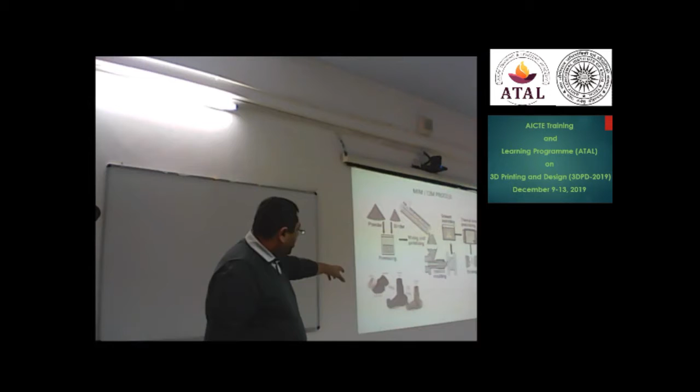What happens after this molding process? You can put the material back if the molding fails. But after the sintering process, you can't put the metal back as a metal powder. It has to go for recycling. Another drawback of this system is, if you make any parts, it's 100% solid inside. You can't actually make the internal structure. And internal structures can save you about 70% cost of material, because you can get the same strength by making a lattice structure inside, like a honeycomb structure, to get the same strength of the part.

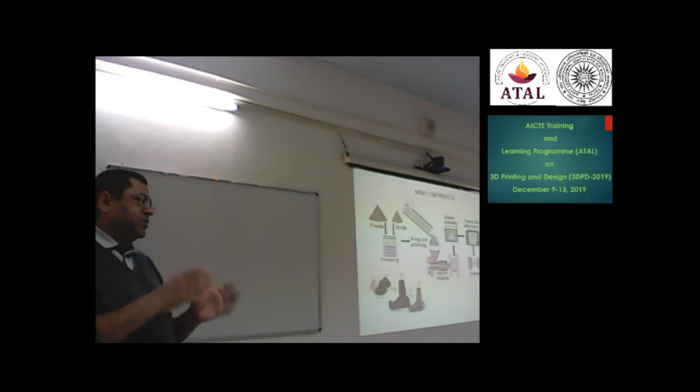Another problem of injection molding is you can't create grooves or cuts in many places, as the mold has to open and the part has to go down. So you can't create a lot of different faces or cuts. It's a very straightforward process. So that's another drawback of the current system.

Now let's look at casting. What's happening in casting is, you make a part, you put it in the mold, that mold is put in the oven, and the part is usually made of wax. It melts down, you fill it with metal or whatever material you want, and then you get your final part. Again, it's a solid part. You can make a lot of faces, but it's a limitation because you need a setup, you have to be trained in casting. Casting fails very fast because if you make even a little error in the process, there will be cracks or minor pores inside the cast part.

Then there's sand casting. In sand casting, again you make your part, it goes into a mold, which is a two-part mold. You create a cavity, you pour the metal, and you get your final part. So in sand casting also, it's 100% infill inside.

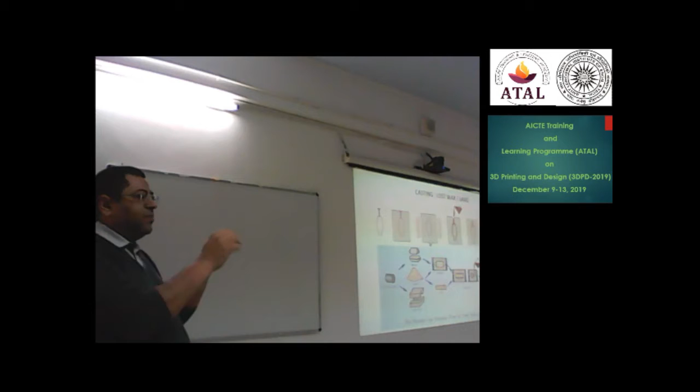There's a seam line on the sand parts, if you see, and that seam line has to be clean for every part. Okay, so all these processes are basically now leading to more work. There is extra work when it comes to doing this.

And also if you see all these processes, they require professionalism. They require a lot of attention of the person making the part, because if there is an error in creating the mold, it will lead to a defect in the part itself. And in most of the industries, they will create oversized parts and then it will go in a lathe or a CNC machine to be finished. Okay?

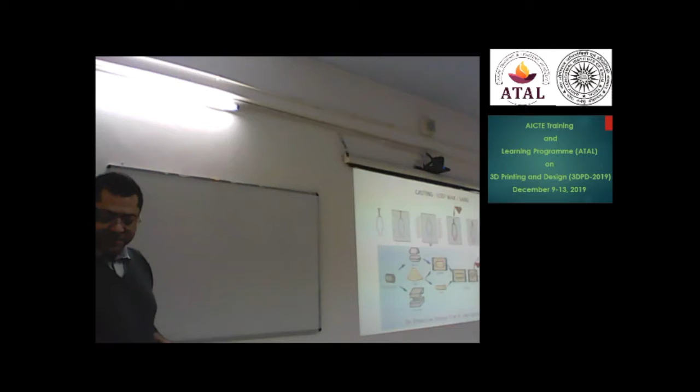So that brings us to 4 types of technologies when it comes to 3D printing. One is powdered metal or ceramics. So what is powdered metal or ceramics? We take powdered metal and we layer it in a very fine layer. Then we use either laser or a binder to join those metal particles together. These layers are 10 microns or 5 microns, so they are very fine layers, melted or binded by a specialized machine, layer over layer.

So now if you imagine yourself in 2D, you can actually create internal structures and the whole part is created as one piece. There is zero wastage because the powder which is left unbinded can be reused again. Okay? I'll just show you a short video of how this works.

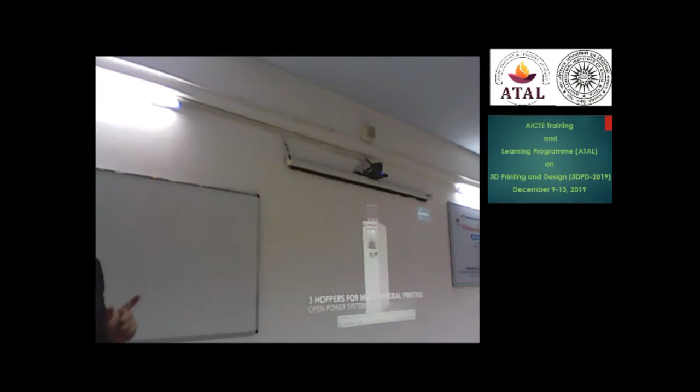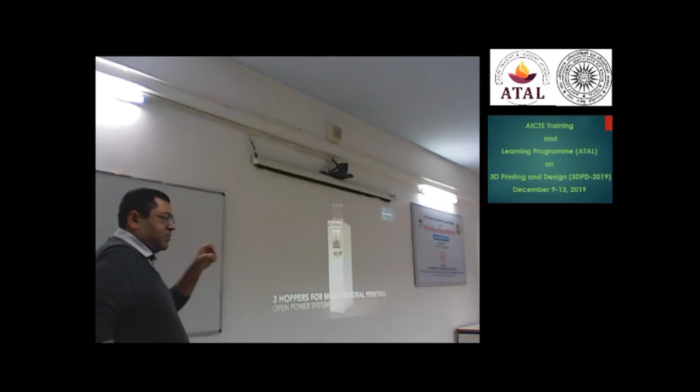So this is our machine. It's called Aurora Labs. It is a desktop metal printer which runs on powdered metal. There are 3 hoppers on the top, which allow you to put 3 different metal powders on the machine, so you can technically print 3 metals simultaneously. Then there is a chamber used for making the part. It's a vacuum chamber with argon gas inside, so the part doesn't get oxidized. We all know metal gets oxidized if you make it hot at certain temperatures.

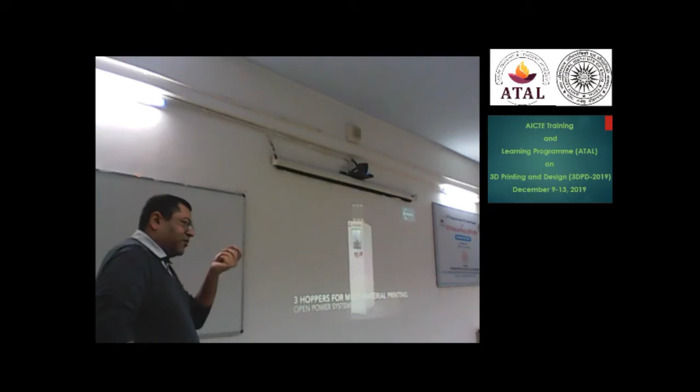Once you start printing, it layers a very fine layer of powder, sinters it using laser, then puts another layer and sinters it. It's like welding a layer, then another layer of weld, another layer of weld, and then you get your part. But we are welding using very fine laser, and the particle is very fine, so it creates a part which is 100% solid. You can create hollow structures inside, and it's very fast actually.

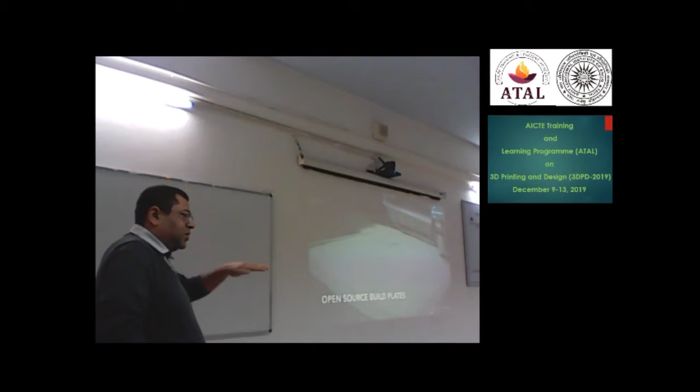So if you saw the process, these are very, very fine powders, almost like 50 micron size powders. It's laid on a bed, the laser fires it, the next level is formed, and so on. There is a wiper to wipe out excess powder from that layer. So everything is happening in micron layers.

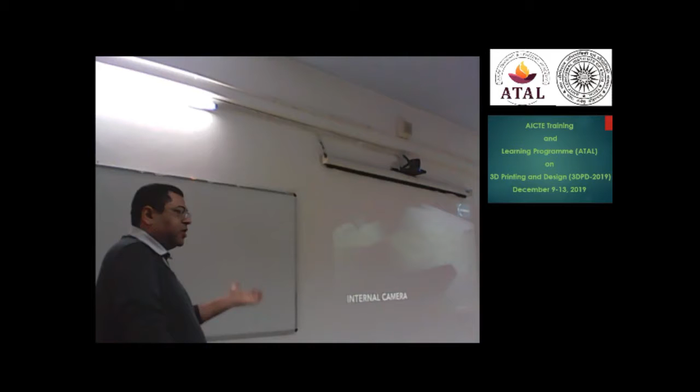So this is a heap of powder which is left after the machine finishes, and you have to manually remove it. You can also use a specialized vacuum machine for removing all the powder, and it's 100% reusable. You just put it back in the hopper and reuse it next time.

I'll just go back a bit. Where the pointer is pointing, these are structures we have to put to support the part when it is getting printed, and they also help in removal of excess heat. Because it's using laser, it's running at around 1800 to 2000 degrees centigrade, so you have to remove the excess heat from the metal, otherwise it will start to warp. Like plastic starts to bend when you heat it, and that's the importance of

Lost PLA or wax casting. That is another area where innovation is very important in terms of additive manufacturing. Even though it is very close to the current technology, there is a lot of difference. If you see a jeweler, if you see dentistry, if you see lots of occupations, these people can only make a few items by hand, and not too many people are skilled in making artwork.

So if you see a normal potter, for example, he is good at his pottery, but you and I are not very good at pottery. We can't make a pottery design. So what can we do? We can simply design it on the computer and print it on a printer. And we'll get the same design output as this.

So this has helped in changing the jewelry industry a lot. Because today, you can simply feed the design into the machine, and anybody at the press of a button can keep printing it. And 90% of the industry that you see is just repetitive work of printing. Okay.

Another thing that was happening is, even if they wanted to print one or two jewelry designs, they had to go through the whole molding process, which means they had to first make the design in wax, then make a silicone mold out of it, and then they could make multiple pieces. And there were limitations, because if I had to make two pieces or three pieces, it used to cost a huge amount of money. And there's a lot of wastage in terms of time. Time is very expensive for a person like a karigar.

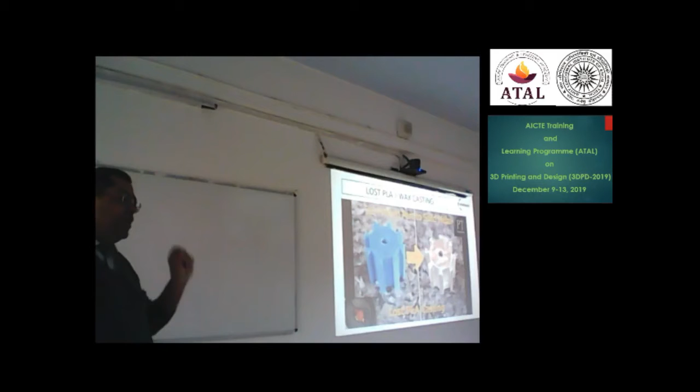Another thing that you see is mold cavity creation. So, why spend time making a mold when a machine can make that for you? So, these are high temperature ceramic blocks, and it's simply printed on a machine.

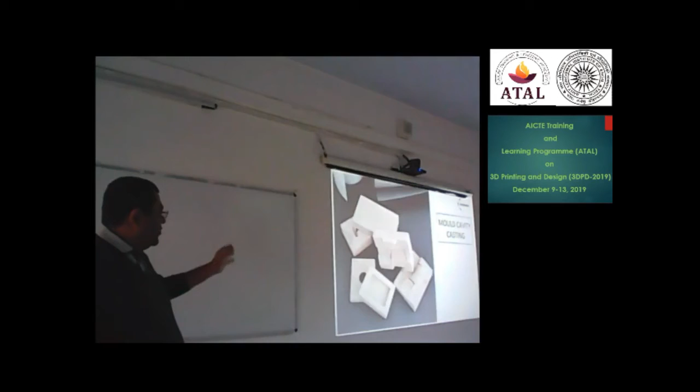So, if you actually go to a traditional industry, first they have to make a masterpiece, then they have to create mold blocks for every part of that masterpiece. Then it goes for casting, it goes for validation, then it can go into production. There is a huge cycle from actual prototyping to production. It can go anywhere from 2 years to 5 years. We have completely cut short that process.

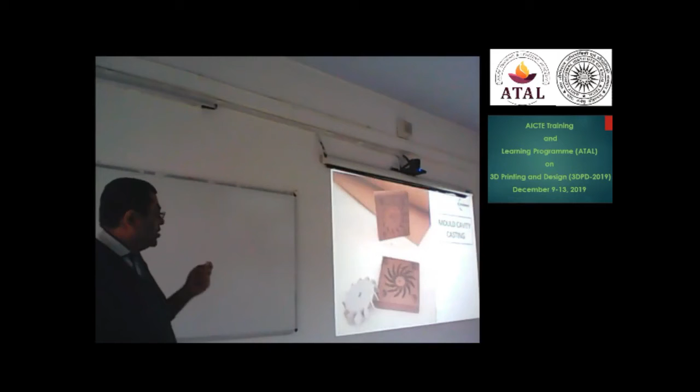So now you simply create the mold, and this mold is from your design on a CAD, so it is absolutely accurate to the final part. So rather than you doing all the work, the computer is doing all the work for you. All you have to do is think on developing your part, and the mold cavity happens by itself. Okay, so I'll just show you a short video on how this machine works.

So this is Ceramo. It's a ceramic printer, and it can print about 8 types of ceramics now. But it's totally open source, which means you can put any ceramic, porcelain, or such material, and you will get a print. So what happens in this machine is, you put fine ceramic powder of whatever you want to print with. You can make food grade ceramics, you can make high temperature ceramics, anything. It can be very high end ceramics for making spacecraft parts, does not matter. You just put it in there.

It uses a binder to bind that ceramic into a shape, and then you put it in a kiln, fire it to make it a proper part. Okay, so the firing process is old, it's been used for thousands of years. It's a well-known process. All we are doing is binding it using technology. And you can bind almost any kind of ceramic powder in this machine. It's a very fast machine. So very soon you will be seeing a lot of your cups, plates, and other things getting printed on this. That's Ceramo.

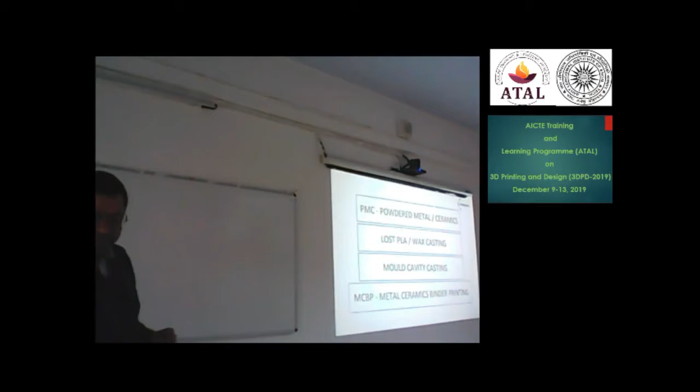So this is called FilaMet, or short form for metal filaments. This technology is available in our institute now. What happens is, it's 80 to 90% metal, with 10 to 20% binder, depending on the metal and the compound. You simply print it like PLA. So because most of you have not printed before, I hope you will understand. You will have to try it out once. But it's very easy to print it.

Everybody must have used a glue gun, right? It's just like extruding a glue gun out. So imagine a machine like a glue gun, and it's doing the same job. It is that easy. Now imagine the power of this technology. Even a 9-year-old can print in metal. All he has to do is insert the filament in the machine, put his file, press a button, start, and that's it.

So it's very, very inexpensive to use these things. And the applications of this technology are far greater than we thought. Not just metal or ceramics, you can do any kind of earth materials, whether it is marble, rocks, glass, any kind of metal using this technology.

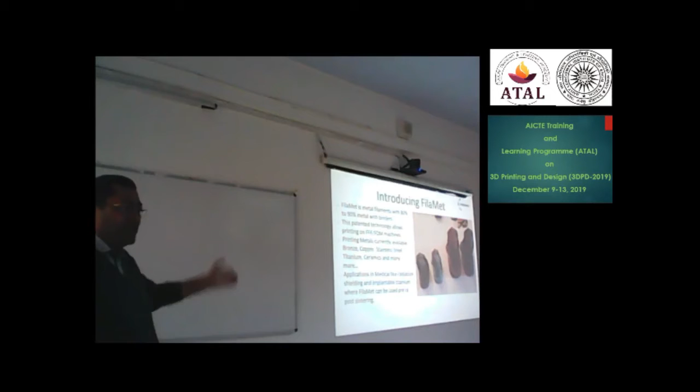So how does metal ceramic printing actually work? At the forefront of this technology, there are two companies which are now the leaders. One is very old, BASF, everybody knows about them. And the new one is The Virtual Foundry. What you do is simply make a part and slice it using specialized software. Because most of you have not used Cura before, I am not using it here, but Cura is the software that we use to slice it. It gets printed on an Ultimaker.

Then, depending on which company's filament you are using, it goes through two technologies. If you are using Ultrafuse, it goes into catalytic debinding, and then finally into a sintering oven. If you use The Virtual Foundry, it simply goes into the sintering oven after print. So this is like a workflow.

So you take the filament, make a part, print it, debind it, put it in the sintering oven, and then you have a metal part. It is that easy. So you can continuously print it, continuously debind it, continuously put it in the sintering oven. And just before the sintering oven, the 3D printing part is something which is so easy that even children can do that. It's a really, really easy process now.

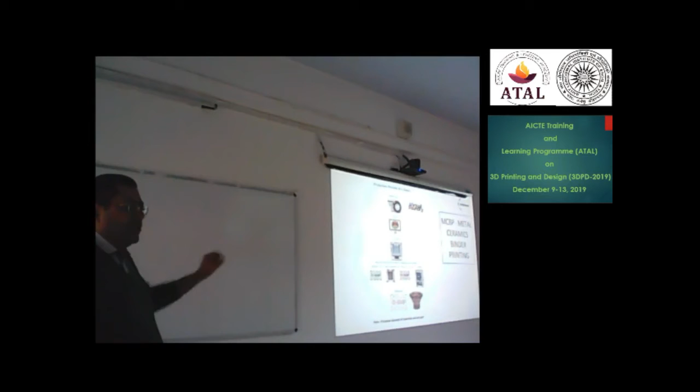So again, explaining the process to you: you print, you polish it. It's a very mild polishing that you can do. Or if you don't like the print, you recycle it. It goes into a sintering oven, or you can use that unpolished piece. As I told you, electromagnetic radiation shielding, there are so many applications where you don't need to sinter it. So you don't need to spend that extra money in sintering it.

After sintering, you can do polishing, painting, chroming, plating, whatever you want on the metal part. It's a pure metal part. You can do whatever you need, annealing. There are so many post processes which can be done on metal parts. So this entire process is actually good for metal, plastic, ceramics. And that's one of the best things: if you don't like the part, you can reuse or recycle it. All these things are recycled.

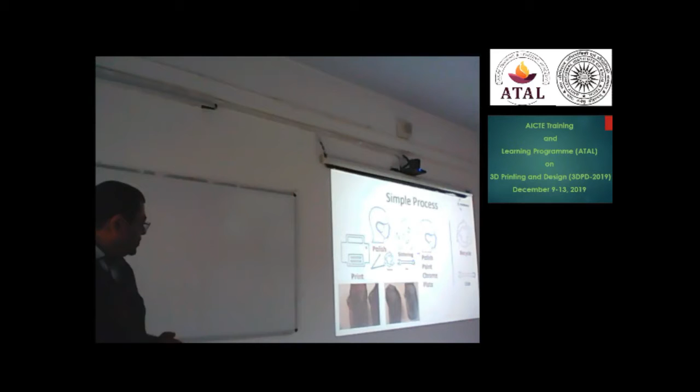So what are the advantages of this technology? It's very easy to handle. It doesn't require specialized machines or anything. It's just a filament. 1 kilo, you can just carry it wherever you want. The capital cost of using it is very, very low. You don't need a very big setup. All you need is a machine and filaments. That's it.

It's very easy to prototype, and there is a lot of design freedom. So you are not limited to thinking how the machine works and then designing it. Here you are designing it and then making the machine work according to you. And it's 100% recyclable material.

That's again ease of production. So it's not just limited to 1 or 2 pieces. Now we are setting up farms where there are thousands of printers in a line, printing thousands of parts a day. So if you see Ultimaker, which is in your lab right now, it can be connected to the farm network and you can actually put hundreds of Ultimakers in one farm. And automatically the prints can be given to that particular printer.

So applications, just summarizing the applications. Tooling is one of the biggest applications of this technology: to create specialized tools, jigs and fixtures, clamps and robotic parts. Robotic parts is one of the biggest industries we see coming up, because it's not limited by how to use the technology, it is how you want to use the technology. One of the companies that everybody here should go and see how they are using the technology is Boston Dynamics. They have created robots which are just out of the world.

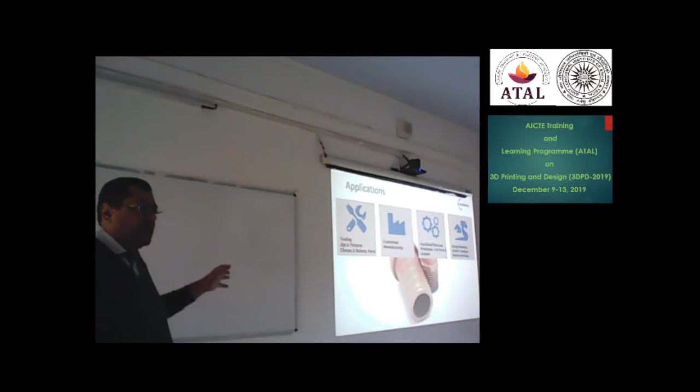Customized manufacturing, functional parts and prototypes, test parts and samples. So it can be any one of them. It can be a functional part which you want to actually use. It can be a prototype part. It can be a sample that you want to show to the customer and get final output out of it. Design elements, artistic creation, statues and more. So it's not limited to just these. There are lots of other applications that you can use it for.

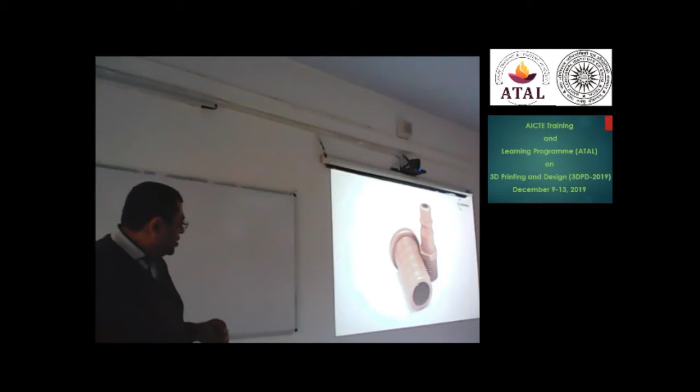This is a very simple design, but it is not as simple as it looks. Even though it's a character piece, if you look very closely at the rim, you will see there are micro pores in this. And that is to take away certain stresses which this particular designer had while making this part. Even though it just looks like a simple piece, if you take it to a traditional industry, they'll say, I'll make it in 5 minutes. But it's not possible in the traditional industry, because there are micro pores on the rim which you can't even photograph, it's that fine.

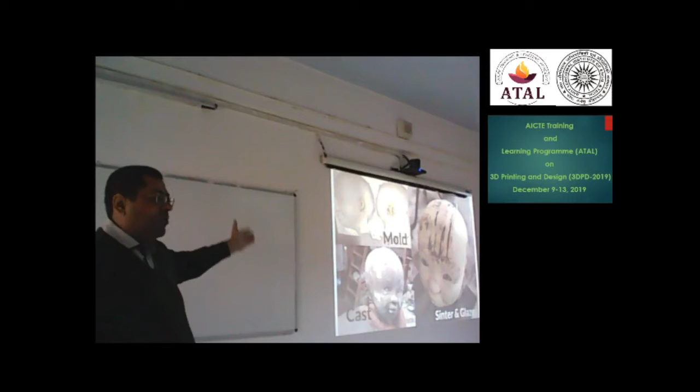If you see, the traditional pottery industry is slowly disappearing. And that is because of the lack of skills, not because of the need for pottery. It's because not everybody has the skill to continue their father's work. And they become bad at it, they start failing, and then it disappears. To revive it, it's a simple thing. You make a mold, cast it, and it's a very simple casting process.

And this is a workshop which anybody can do. Even you can do it just sitting idle. It's a really good thing; pottery or clay work is very good actually. So it's very easy, but you have again got that industry back. And that's something which is very good.

This is again one of the materials, BASF Ultrafuse 316. It's similar to Catamold, which everybody uses in the industry. And these are prints out of that. If you notice, there will be slots cut all around the parts, like these, which are not possible in the traditional industry. So you can't have side slots, a very deep gallery or a slide shot in a traditional industry. It will need a lot of processes to do that. And each piece will not only take time, but also will cost a lot.

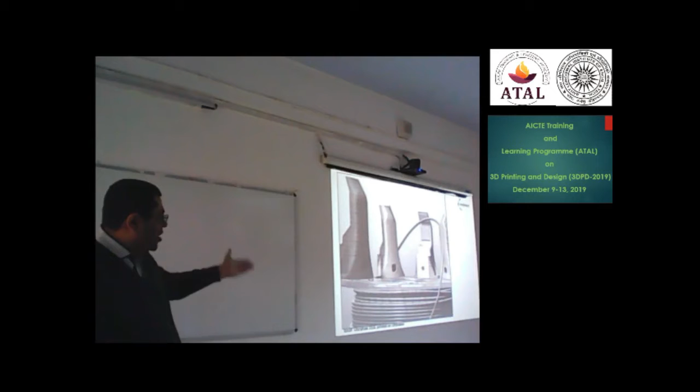Over here, it's just a matter of printing. So you take a simple filament and you print it out. And it's that easy. So this is the capex or the machine that we have for doing this. We have a pellet extruder. Pellet is one of the oldest things that you find anywhere. There are lots of pellets in the world. There are more than 15,000 types of plastic, metal and ceramic compound pellets that are getting used in the industries. All you do is simply take those and you can create your part on one of our machines.

Ultimaker, which is already installed here, is one of the easiest machines that you will find in the world. And not only easy, it's a workhorse. You can literally run it continuously and nothing will happen to the machine.

It's a sintering furnace. Don't go by the price here. This particular furnace is a little expensive. But what we need to say is, you can actually sinter our parts in a sintering oven which can actually start around 80,000 bucks also. But those are only for certain limited materials. Okay? So a lot of jewelers, for example, use a machine which is hardly 25,000 rupees. And they can simply print on our machines and sinter, because they are using that particular metal which is sinterable on that. Okay.

One of the things which I showed you is the lost wax process. Remember, this particular company makes fan blades. It's a special blade actually, which is used in the boat industry. And 100% of this blade is cast after printing. So that's the print that you see, and that's the casting part.

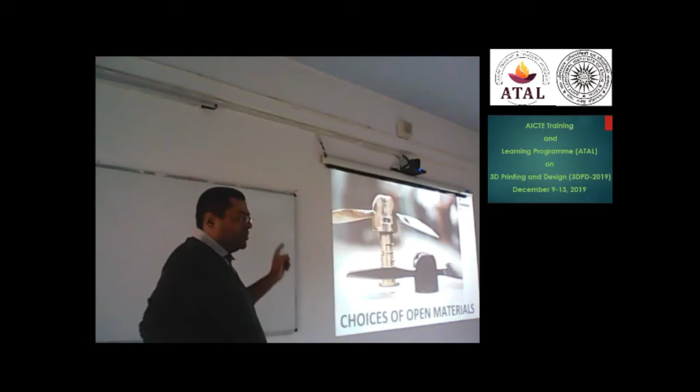So around 2 years back, we tried with them this technology where we started printing on a special material called molding plastic. Okay, we simply print with that plastic, put it in the furnace, put the metal, and it becomes the part. And after that, you just simply polish the part, you can trim it a bit, and that's it. So now they have saved literally thousands of dollars on their warehousing costs. They don't need to think about keeping any molds. All they do is simply print, cast, provide to their customer.

And it's on demand, because the printing of these vanes takes hardly 2 to 3 days, and casting takes 1 day. So the turnaround time has reduced from initially 2 to 3 months to days. And they can make different vanes for different customers now. It's design freedom. Now you can think of doing whatever you want basically. So all around their yachts, they have customized everything from door handles to whatever you can think of, including the ends on which ropes are tied. So it's the boating industry.

So again, if you see across, there are lots of challenges which were solved over the period of our work time in different industries. And industry is such that once you make a change in that particular industry, everybody follows the trend. And now we have lots of people in the yacht industry, the boating industry, coming to us and saying, can you set this up for me? Because it makes a huge change in the whole economics of the company.

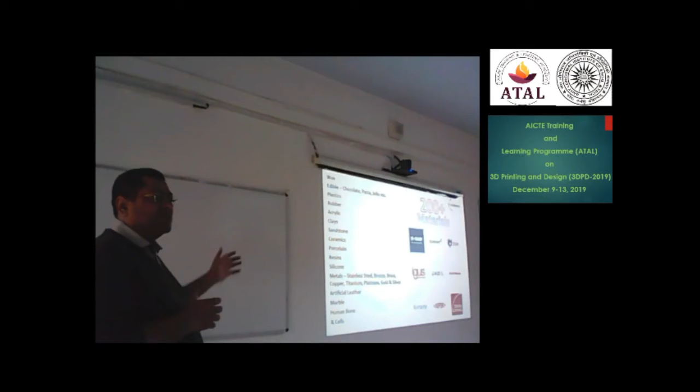So, when I talk about design freedom, this is what design freedom means. You're not limited to something which you study in books. You're not limited to something which you think you want to do, but you are held back because you don't have the necessary tools. Today, it's very easy to get the tools. It's very easy to design, and it's very easy.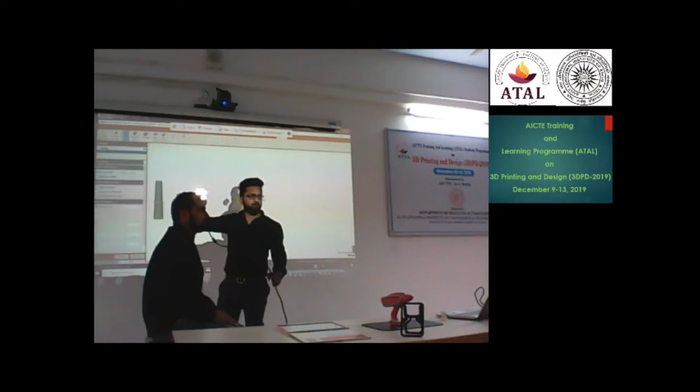So usually when we do this type of a scan, the person will sit on a revolving chair so that the person revolves and the scan can take view from all sides. There will be a lot of space to move around. So there are some restrictions here, but yeah.

So somebody asked me for the black color, right? So usually when a person is doing this scan, we will make them wear like a mat hat or something. So that will cover all the hair part, and then you can go to any software and recreate the hair. Anyways, when you are printing, you will not get a regular hair texture.

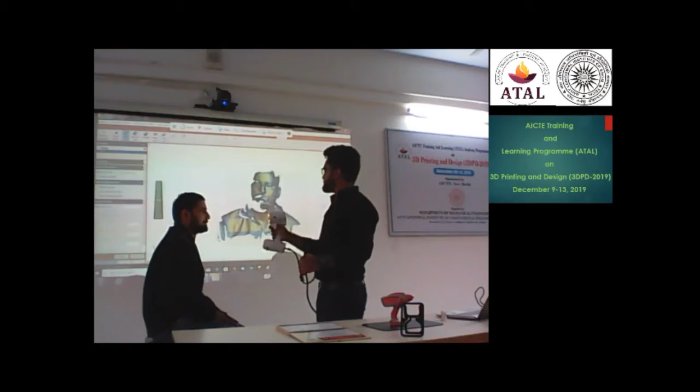So it's like photo editing. So you can actually keep a set of hairs and just place on the person and then redesign. So it can scan hats and other things very nicely. So you can use any kind of hat to replace it. Sir, in our industry, we usually use chalk powder.

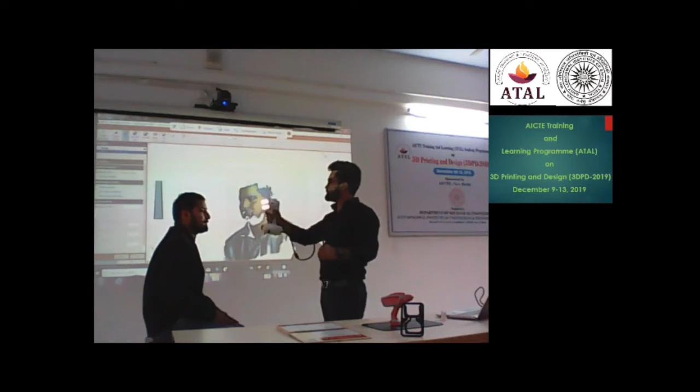Yeah, so you can use anything to make it like off black or shiny. There are methods in which you can take certain type of gray and shiny objects by increasing the intensity of the light that falls on the skin. That is possible, but that's something which might not give very good results.

So as you said, chalk powder, you can use spray. They are very fine powder anyway. You can use paint, white paint. You can use markers to create those same structures.

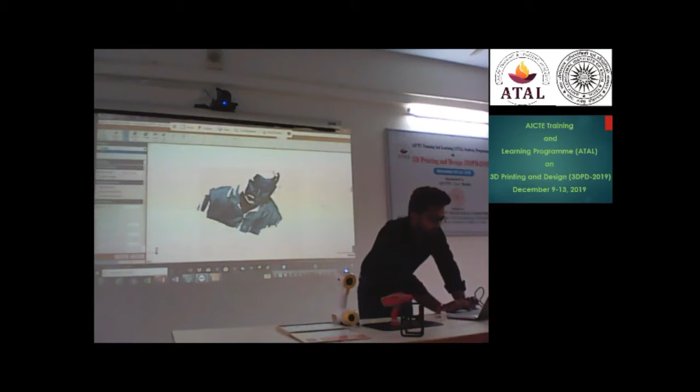So as you can see, moustache doesn't come. That is the area which you have to cover and replace it while you are doing this thing, or you can put stickers and then take that area and remove it later on.

The powder which comes out from the parts is recycled again as fresh powder which can be used in the machine again. So there are certain videos attached which you can see on our website. It's very easy actually how to do everything.

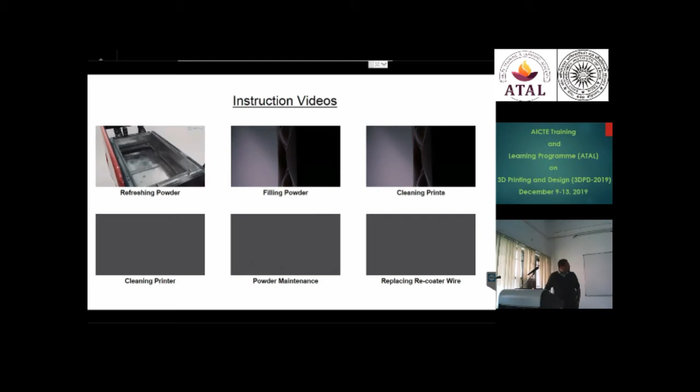Sinterit simplicity of professional 3D printing. Recovering the powder. Before using the device, it is highly recommended to read the full printed version of the user manual. Gather the powder using tools included in the set and transfer it to the printing form with the rest of the powder. A portion of the powder is located in the overflow bin. Take out the overflow bin and transfer the powder gathered in it into the form with the previously used powder.

Sometimes, some powder may collect beneath the overflow bin. Remove it so that the overflow bin may be replaced properly. The remaining powder should be grinded down. In order for the powder to be suitable for reusing, mix it with fresh powder, which quantity is calculated by the Sinterit Studio. For measuring the powder, use the measure included in the set.

So what happens is whenever you run the machine, after the machine shuts down, it will tell you how much fresh powder to put or mix with the used powder. So the machine actually calculates everything for you. All you need to do is measure that much, put it in the old powder and you get a new powder. And it's very, very easy.

Sinterit simplicity of professional 3D printing. Taking out the print and cleaning it. Before using the device, it is highly recommended to read the full printed version of the user manual. After finishing the printing process, wait for the printer to cool down. The current temperature inside the printer is displayed in the Temp tab.

It is impossible to open the lid if the temperature in the tank is higher than 50 degrees Celsius, 122 degrees Fahrenheit. Wait until the printer cools to below 50 degrees Celsius. But even when the temperature is around 50 degrees Celsius, refrain from cleaning the print until it fully cools. For cooling, open the printer, move the printer bed up, and leave the print for approximately an hour.

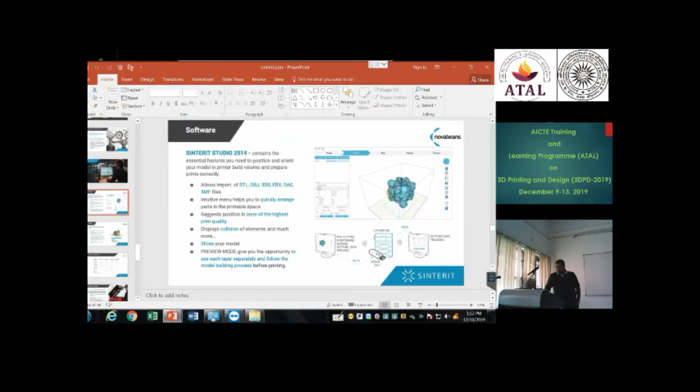The first thing is how to do metal printing on Ultimaker. Okay. Then we have for you a ceramic printer. So you can also do ceramic printing on Ultimaker, but that's a different type of ceramic printing. So let's just see some of the functions of Ultimaker S5. This is the S series. What it has is a touch screen, very easy to use software, and a really large printer compared to the other Ultimakers that we have.

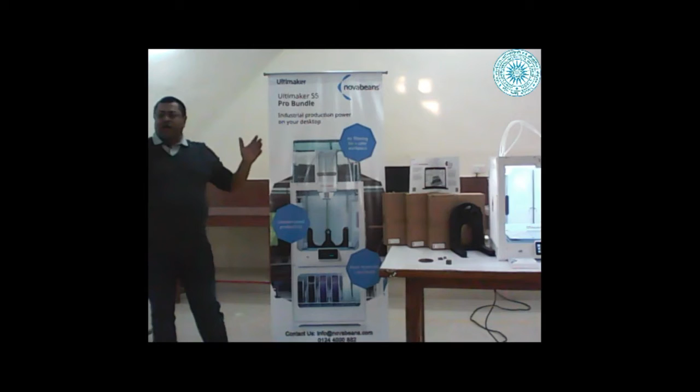So what happens is, if you are printing large parts, you require more than one spool, and then you are in a constant mood of tension. The moment that finishes, I have to insert another filament. Material station automates the whole process. And if you are doing multi-material printing, you can actually set it up like that, and it will take out the filament and use a new material automatically. So that's a new functionality which was added to this machine, and it's really a powerhouse right now. Okay.

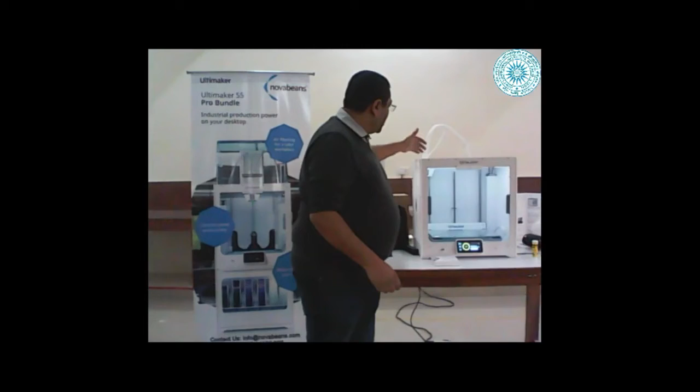So very simple functionality. It has two nozzles. The nozzles are like clip-ons. So this is the nozzle.

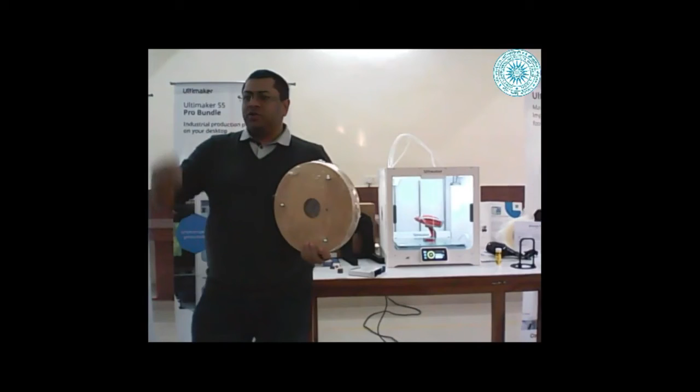So if you see, this is the filament, and it comes in 0.5 kilos, 0.25 kilos, and 1 kilo sizes. And it's just like a regular filament. So you just attach it in the back of the printer, and you just give it to the feed, and that's it. And it prints like a PLA. So PLA is the easiest filament to print with. It's almost like that. There is nothing else required to print it. And it's as easy as that to print with.

Okay? All you have to do is pass it through a filament feeder which is attached to the back of the machine. And that's it. So it's that simple. And you can print all the metals like that, including stainless steel, titanium, aluminum. There are so many metals that you can print with this machine. So typically one machine solves all your problems.

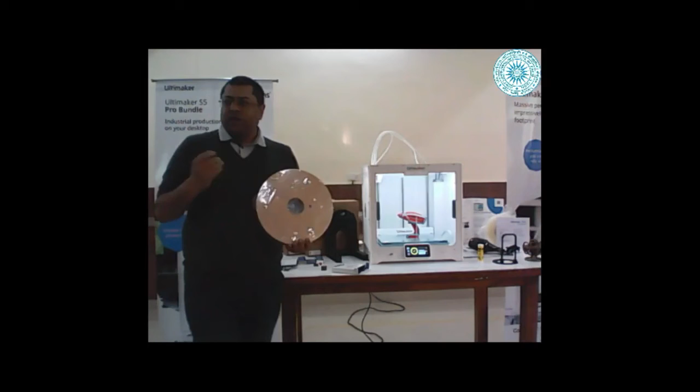Similarly, we have ceramic filaments, and we are going to come up with some biofilaments also in the future. There are filaments which are used for making like peristaltic pumps, which are used for making chemical safe fluid handling systems. There are filaments which are used for making like slider gears and other things. So there are filaments for every application, and it's a whole new world out there.

All you have to do is go to the Ultimaker site. Under the partner program, you will see the list of all the filaments, and you can select which one you like, and all the configurations are already present. So the moment you actually start Cura and select the filament, the configuration will get loaded onto the machine by itself.

There are certain filaments like Ultimaker's own filaments, which do not even require you to tell the machine what filament you are putting in the machine. It recognizes the filament by itself. So if you see here, it already knows that you have put a Tough filament material. It has an NFC tag. So the moment you put the filament in the station or behind the machine, it recognizes that and it tells you that this is the material you have installed.

So you can't actually go wrong putting the wrong filament, or have to remember the settings every time. This machine does that for you. So you don't need to remember the settings. It has got the settings for almost everything already inside. Also, it checks the type of nozzle you have put for the particular filament.

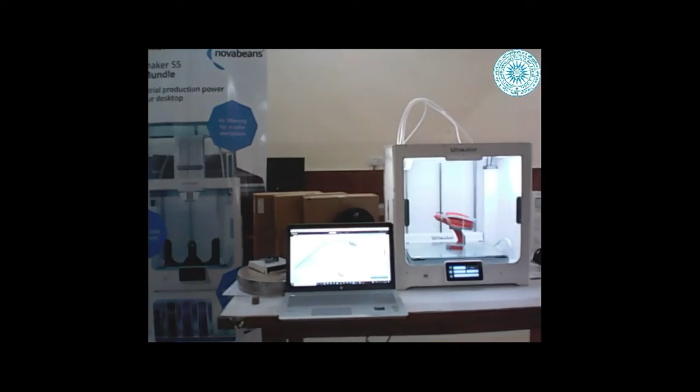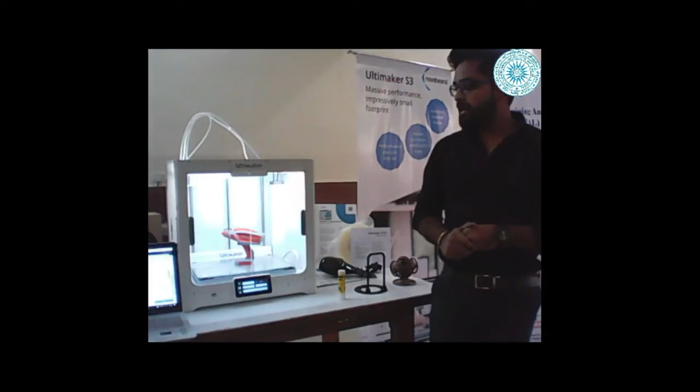Okay sir. So to print on the Ultimaker, there is a software called Cura, and now I will be telling you how to initialize your printing, how to start the printing process. As you are already aware, there are three types of print cores available: AA, BB, and CC. AA is used for general materials, for PLA, ABS, nylon, PC, polycarbonate, and with CC we will print metal filaments. And right now I will tell you how to print with metal filaments.

Okay. So if you see Cura, there are three options available here: prepare, preview, monitor. Prepare is an interface where you import the STL file and give some settings, I mean the layer height, infill, temperature settings and all. Next is preview. Monitor is when your printer is connected to Wi-Fi, so you can monitor your prints. There is a camera over here, and you can see whatever is printing.

So let's say you have more than one printer, and you are sitting somewhere in the room, you want to see what is getting printed. Or 99% of the time, you will be putting the prints at night, and the whole night you will have a tingle in your brain: what if my print has failed, what should I do with the printer. So you can put it on Wi-Fi, use a mobile to track the print and see how it's printing. And if it doesn't print properly, you can stop the print from the house.

So at least you will be saving on the printer and the machine time, and from cores getting spoiled or whatever. And you can also transfer the file from your house if the machine is on and everything is set. So by the time you come, maybe the print is ready, or it's already halfway printed. So there are a lot of features associated with this.

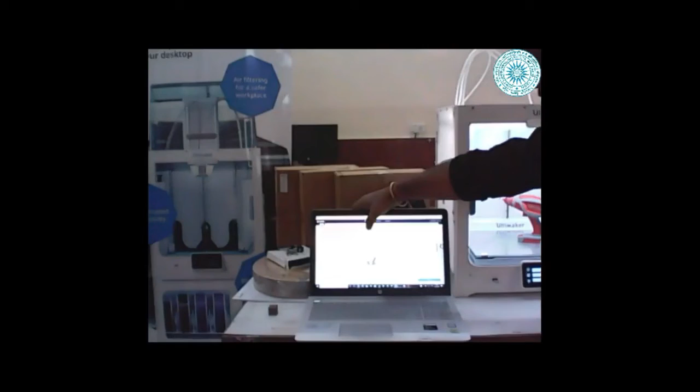So we are going to print with metal filament. We just have to select PLA over here, where we will be printing only with PLA settings, but we will be changing the temperature a bit and the speed of printing. So from here you can select, if you are using ABS or PLA.

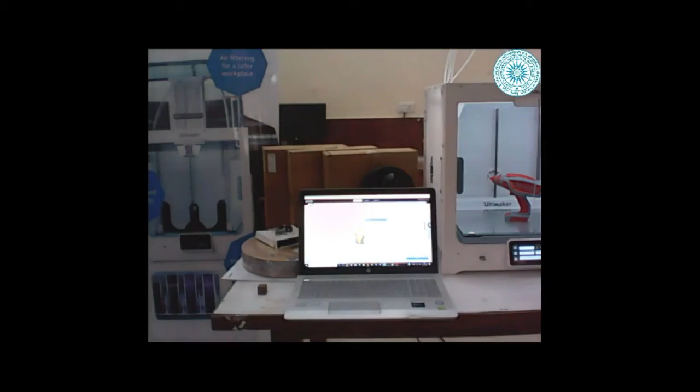Actually, right now they are not connected to the Wi-Fi. Otherwise, you can go to the Ultimaker marketplace and download the settings for printing with these filaments. It's available online, but because we don't have Wi-Fi connectivity we can't get those things. Okay?

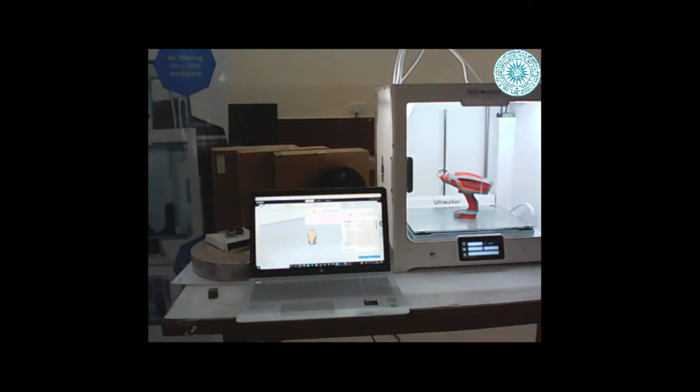We have to define the other one, but we will not be using it, because with metal printing we make sure that there are no supports in the object. We can make the support with the same metal filament as well. But mostly you will use the second extruder when printing with PLA and PVA, a water soluble material. Okay. So in slot 1 we will be using the CC print core and metal filament, and for metal filament we will select PLA here.

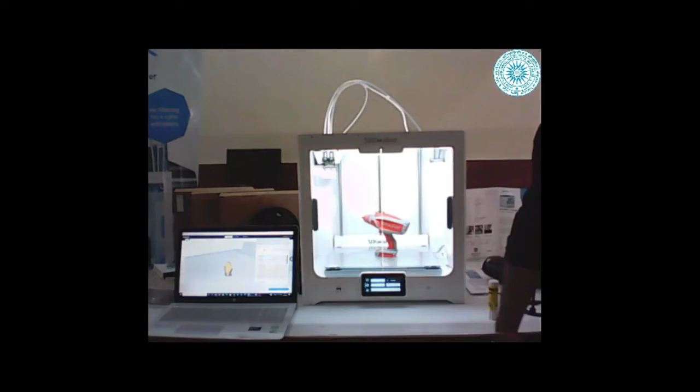And the next step is to give your settings. The first one is layer height. It's the height of one layer only, since it's layer by layer formation. You can define 0.1, 0.2. 0.1 is the most preferred one; surface is really very good at 0.1 mm.

So layer thickness is the layer height. Then wall thickness, the concept of wall. Layer thickness again depends on the nozzle diameter as well.

Vertically we are lying the layer.

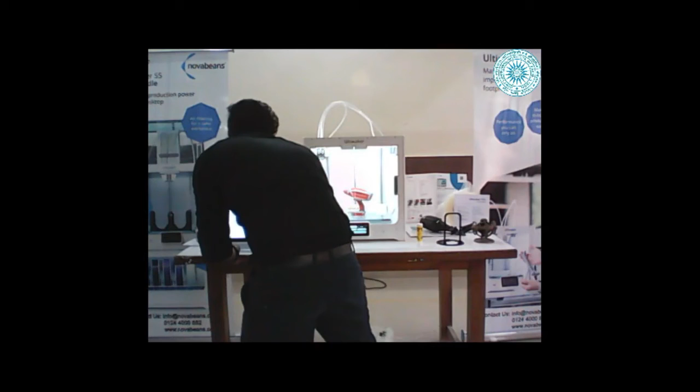You have a lot of options of how you want to fill inside. So either you can leave it 0, which means just a shell. Then you can make honeycomb structure, straight curve structure, spherical structures. All these are already there. You can make a zigzag structure. So you can actually fill the inside, that is what I was talking about, to save the materials. You can also decide on how much infill you want, what type of pattern you want, and the biggest thing is you can change it also.

So in a big part, you might want a certain part to have less infill. By the time you reach the top, you want a little more infill so that you get a better quality of output. So that you can do in the software. So the software is really powerful. Okay. So inside, if you see the yellow lines, it's infill. And if you see the green and the red one, these are the shell thickness.

So in the software, there are also some quick settings, which is fast print, normal print, and good quality. So they have already given you some quick function. If you don't want to set the things yourself, simply select the filament, press the fast button, and it's like a quick move. So you don't really need to change every parameter yourself. It has quick parameter settings, so that really allows you to do quick work. And somebody who has very little knowledge doesn't need to go into the advanced mode at all. You just press the button and magic will happen.

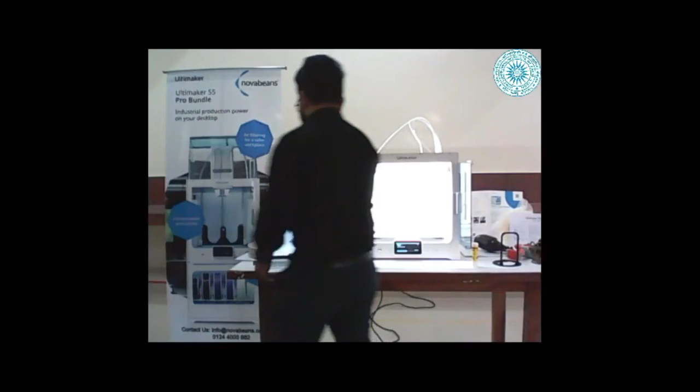Then there are lots of experimental scripts which you can play around with. Like suppose if you want to print wire, like a mesh printing. So you actually design the thing solid, but in the software you can say, I want to print it like a mesh, and it will print like a mesh. But those are things which we advise you to do after a little bit of experience. So by setting those, you can get really interesting parts out of the machine. This one is a PLA.

Can we dim the lights? Light for the machine. The machine will light from the inside, but people will not be able to see inside. You can dim the light, you can switch it off also.

Another thing is that both the cores are on a moving track. So if one core comes down, the other one goes up. Normally on a 2-core printer, one core will just keep touching the prints and spoiling the prints. In this, it goes up. So you are typically printing with only one. There is a feature where you can also create a cleaning block for cleaning the core before you start printing with it. There are lots of features which you can start using as an advanced user and really take advantage of.

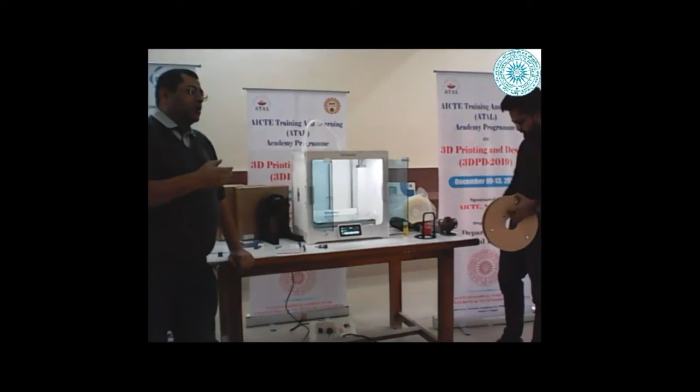Yes. So the software will show you all the overhangs as a red portion. Then it's up to you whether you want to print with support or not. But there have been times when I have actually printed things when it was showing that, and it has printed. So usually, just to tell you, for example, in this object we can print all these parts without supports, even though the software will tell you to put supports. But you can connect these.

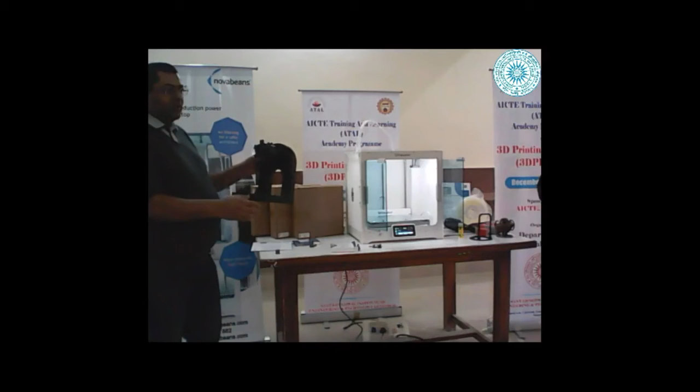Now if I cut this out, you will see that there are hanging structures inside. And why? Because when the first layer is formed, it will actually sag down like a U shape, and that becomes the base of the support for the next layer. So slowly, with every progressive layer, that hang will keep reducing, and this is the final output which you get. So even though in the final output you are not able to see those defects, that hang is still inside. But it does not matter to me because the part is completely closed from outside, nobody is going to see it. You understand? So you have to decide yourself how you want to use it.

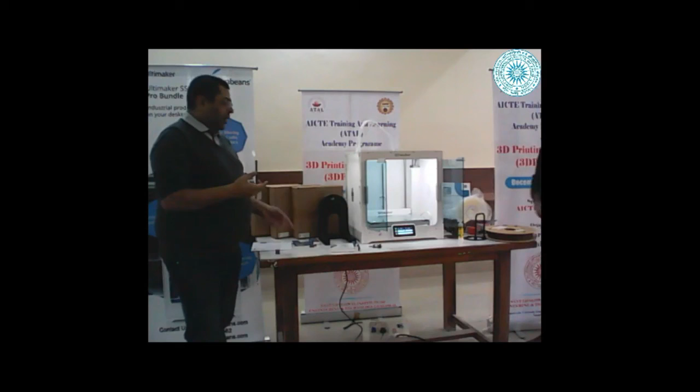Another thing that we do is like a test, where you can print small ladders with overhangs on top. So you can see what is the distance where you don't need a support to print, and design accordingly. Like if you are printing, for example, an arch, you don't really need a support to print an arch. So you can use all these features when you are designing. It really helps you to design.

So there are lots of test prints you can see. They are on Thingiverse, they're everywhere, where you print these steps, these cones, which allow you to understand at what distance I don't need a support, at what angle I don't need a support. And after that, you just start designing accordingly. You can also change certain values of the machine, by slowing it down to see whether that support is printed nicely at that speed or not. So there are lots of things which you can actually do on your own. Right?

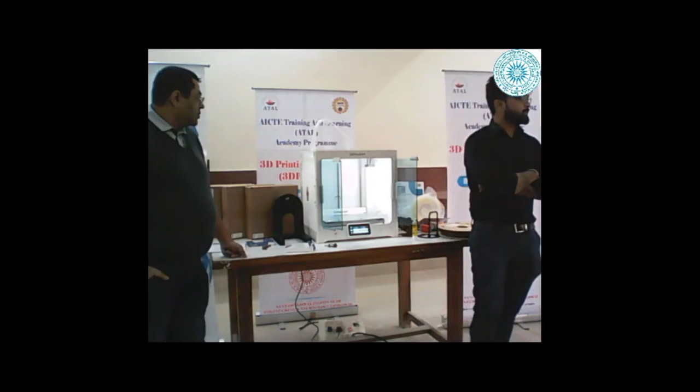Now it's saying carefully open the print head fan bracket and confirm when completed. So this one is the print head fan bracket. You just have to open it like this. Then you have to confirm. Now it's saying remove the print core. Now you can remove it. You just have to press it like this. See, the levers stay over here. And you just have to press it like that and just put it. If anybody wants to try, can come. So next thing you just have to insert it. Press it and then push it.

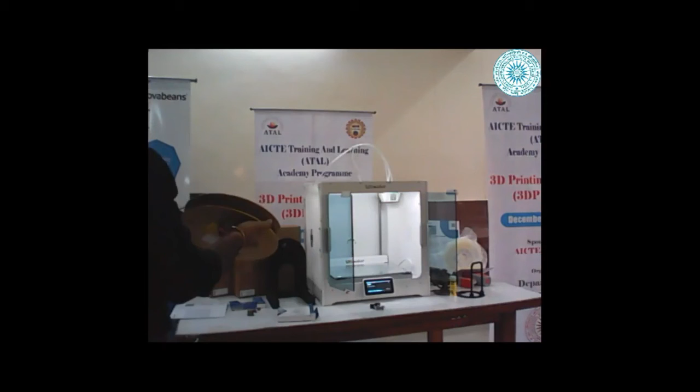So yes, next we have to load the material. So there is an option of material for the first extruder and material for the second extruder. You just have to click here and load. Mesh. Yeah, so this is basically one of the prints which is given, not from Ultimaker though, but you can still see the structure inside. So there is a spool holder at the back. You just have to place it over here. And

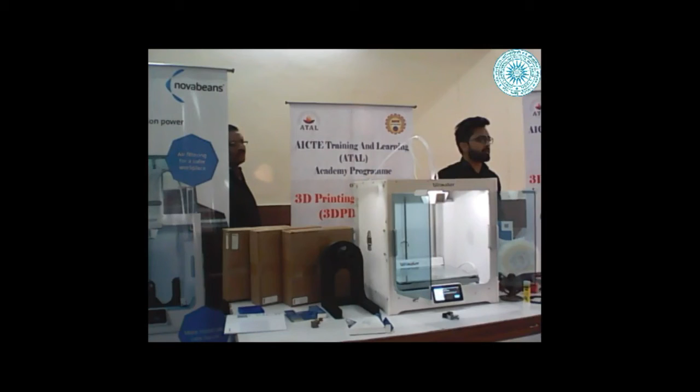So there is an instrument at the back. We call it warmer. There is a tube, and whenever we are using metal filament, only then will we be using this instrument. We just have to make sure that this will be heated a bit before going to the extruder. So the temperature we set is 60 degrees.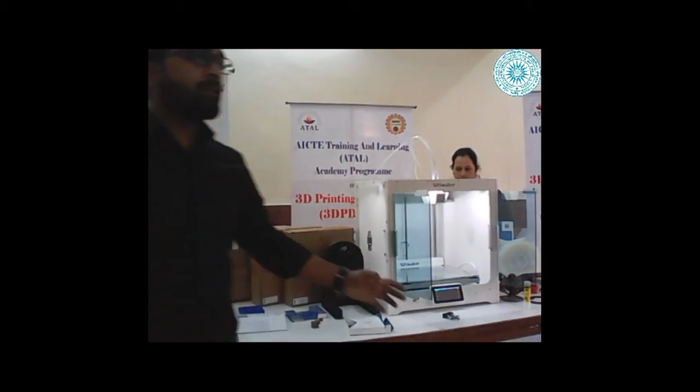So in the same place they have put the new spool. It's asking for the material setting for whichever material you are inserting. So we just select PLA. We just have to insert a bit from the back. There are two feeders.

So next thing is you just have to wait till material comes out of the nozzle. Then you have to press confirm, otherwise it will stop here. Some materials also.

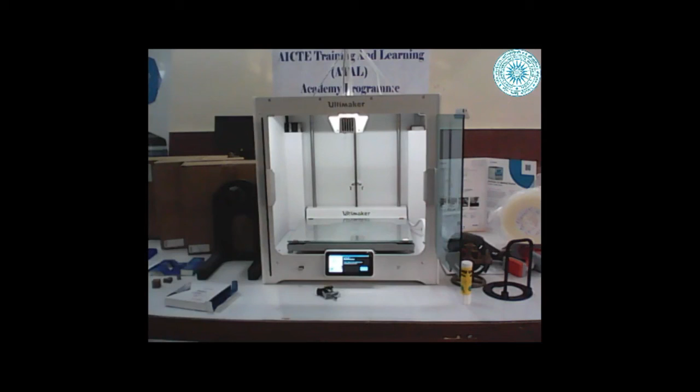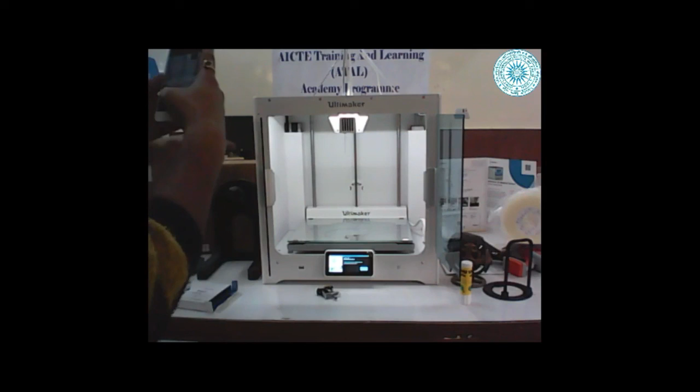So that's a completely different game plan altogether. But the printing process we have standardized. So once that is standardized, that process is anyways different even in the general industry, you know? So it has actually already started extruding. So it takes out a little bit of filament to peel the dirt off the nozzle.

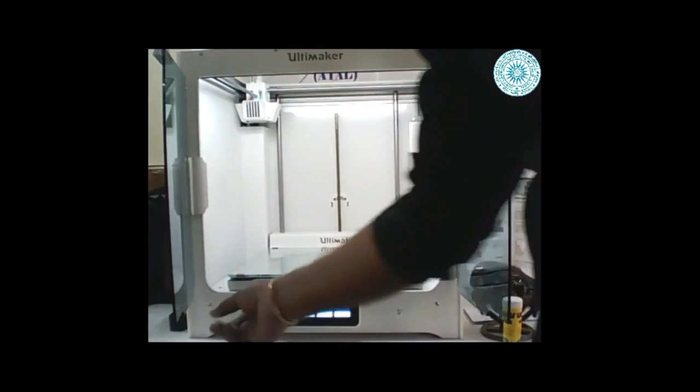So actually, what this machine does is, before every print, it checks the alignment of the bed with the nozzle, and that is a process which takes about 10 to 15 minutes. So we just bypass that. Input sources can very well be Wi-Fi. So you can send by Wi-Fi, LAN, and what else?

It has an SD card. What is the printing temperature, sir? For this one, it's roughly about 200 to 220. Between 180 and 220. But in case of copper, the printing temperature?

So again, as I explained to you, we are not looking at the temperature of the material like copper or the metal. We are looking at the temperature of the binder while printing. Because on all the other machines, you have to consider the temperature of the material you are printing. Okay, and that makes it very difficult. Here the printing process is standardized. Using the filler material temperature.